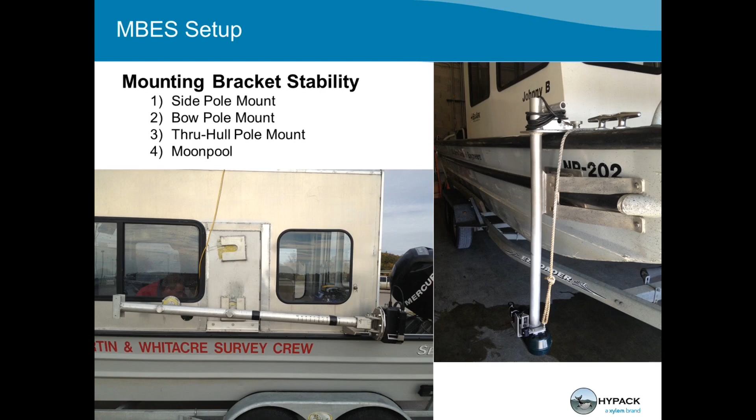Typically, what we try to stress is the 2 points of connectivity to the vessel, whether it's a side mount, a bow mount, a through hull, moon pool, that it is as rigid as possible. And I know the guys that build the USM brackets, the Universal Sonar Mount, and the one that's here, not that I'm downgrading what they build, because the material and every way they machine it is great, I just don't like the 1 point of connectivity.

Basically, if this is my mounting bracket and this is my pole, this is what's going on with those brackets. I have 1 point of connectivity right here and 1 point of connectivity here. But if I've got this sonar, and is Pogo in here? Okay, great. I know you know all about this.

All right, so the Jacksonville district over in Tampa has a universal sonar mount. They called me up, and it's been at least 2 years ago. So, I mean, these brackets are very heavily built, and I have nothing against that. It's just with the 1 point of connectivity, how tall is the gunnel on your boat, above the water?

And then how much further is the sonar below the water? 4 feet. So think of a 9-foot lever arm that only has 1 point of connectivity here. It's got an 80-pound sonar hanging on the bottom, and anytime they got above 5 knots, this is what's going on through the water. And there is nothing that is going to compensate for that.

I don't even care if the IMU is on the sonar head. This is a high-frequency vibration below the water. It's not rolling, it's not pitching, it's a side-to-side movement.

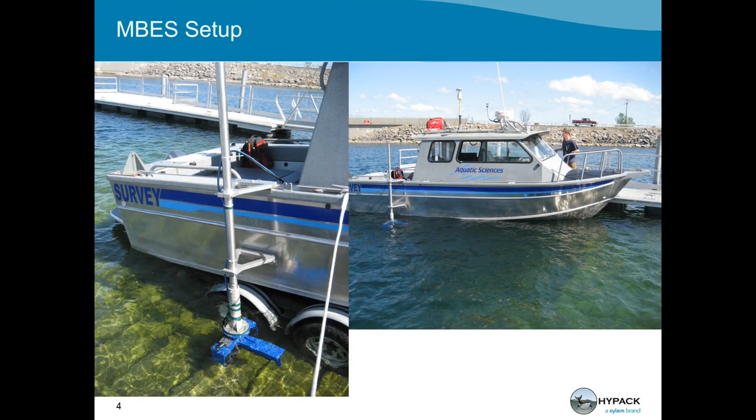Again, probably the most copied side mount bracket is this. I think industry-wide it's known as the Reson side mount. Reson came up with this back in the 90s. It's a very simple U bracket here with a disc welded to a stub arm that's welded to the main arm.

All right, it's got another very similar disc with the stub arm welded to the main pole, and this rotates up into this one. And if you can see, there's a little dot right here. That's a hole that has a matching hole on this disc here, and it's the size of a number 10 screw.

So you just go to Walmart or Lowe's or Home Depot, buy the cheapest pot metal number 10 screw you can get, and you run it through the disc here that runs through this plate. You put a nut on the back side of it, and if you hit anything with the sonar, it simply shears that bolt and kicks the whole system up. Don't damage the mount, don't damage the sonar, and it works really well.

Another point about stabilizing this - we probably have a few overseas people here. There's a gentleman named Duncan Mallace over in England, probably one of the most well-known multi-beam surveyors in that area. He got invited by Reson to give a talk at their users group meeting, and they posted this on their website. I emailed Duncan asking if I could use bits of his presentation, and he said by all means, please do. So let's listen to what he has to say.

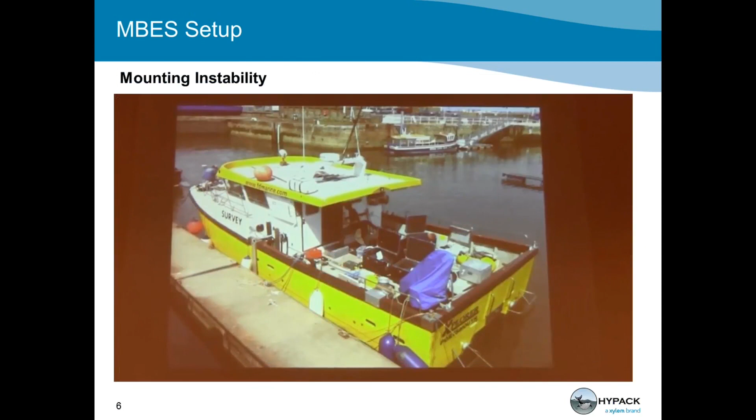We have a two 7125 system here, so we have one 7125 on this pole, and there's a similar setup on the other side. Getting your pole right with your pole mounting hardware, if it's not hull mounted, is absolutely essential. You cannot beef up your pole anymore.

I'm going to stop it right there, but if you can see, this will work. See the little skinny pole here? That's what they were given to mount a Reson 7125 to. See the big pole he's got here? That's what he replaced it with, because they're running a 7125 on each side of the boat - dual 7125s, one on each side. That little scaffold pole is what they thought they could mount the 7125 to.

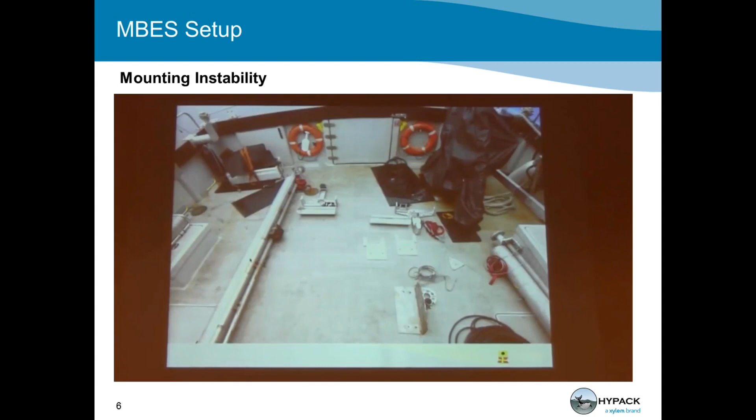He said, forget it, that's not going to work - this is what you're going to have. So we just got a large amount of tubing and structure, and you've got to make sure that fits well to the side of the boat. If the pole moves, you're on a hiding to nothing, you're going to have bad data, there's no doubt about it. So you need to be as good as you possibly can.

Same thing happened recently, last spring. I got a phone call - a customer working out in the Gulf sent the data in, and I could tell the pole was moving. I told them the pole was moving. They didn't believe me, so they flew me down. I got on the boat and said, are you sure the pole's not moving?

This is one of the units, a USM universal sonar mount, again just a single point of connectivity up here. You can see this is like a 12-foot lever arm. And I said, I'm telling you, the pole's moving. No, the pole's not moving. Really?

So while it's up, I had to move this stub arm out of the way, and I just reached over to the side of the boat and gave it just a quick little push. The camera is not moving - and that's in the air. Imagine when it's in the water. This is a 90-foot boat. When it's moving 5 knots through the water, the hydraulic force applied to that pole, it's sitting there doing this through the water.

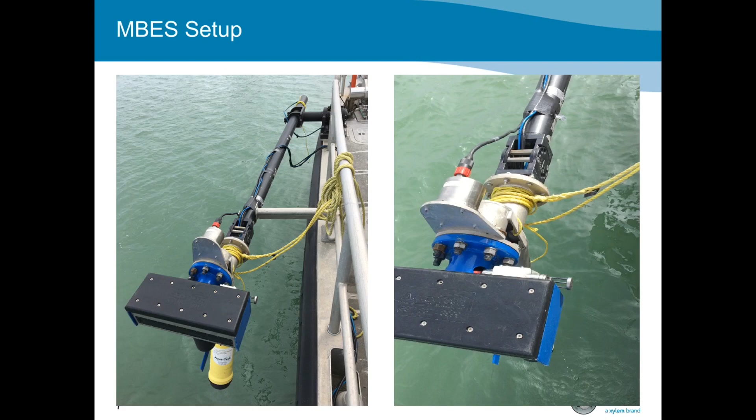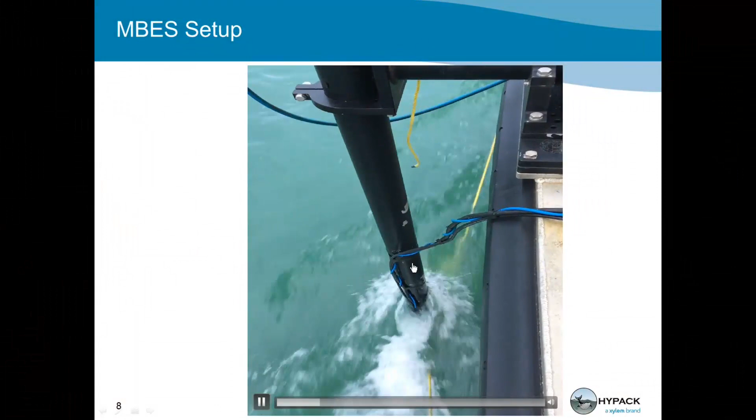So they said, we still don't believe you. Okay, well, let's put it in the water. So we put it in the water, and I did the same thing. That thing's not moving side to side? Really? How long is that pole? 12 feet. Oh yeah, you can't expect it - that's a high frequency motion.

So even if the IMU is on the sonar or on the pole, what's changing is the relative offset arms to the primary GPS antenna. So the antenna says, I'm not moving. The IMU says, I'm doing this. So it's trying to compensate and move all the positions. And the data showed it.

So they literally took me right back to the airport. I got on a plane, came home. But their suggestion was, what do we do? I said, you need to either bolt or weld something to the side of this boat. And the company that owned the boat said, you're not doing that. Yeah, matter of fact, I think they even built one now.

It's real simple - it just needs to be like a C cup like this, that its ID matches the OD of the pipe, and then it comes over and somehow locks on the side of the boat. It's more side to side than it is front to back. The front to back is typically never the problem - it's the side to side movement.

Yeah, but even if you would do it, that's only going to support one side flex, because if it doesn't secure to the side of the boat, it doesn't have anything that keeps it from swinging away. It would help on one side, but not the other. Another option would be a flip-down stub arm on the pole, or to run a ratchet strap under the hull. It might be ugly, but if it works. It's better than what this is. I have nothing against the manufacturer and how this is built, it's just that it only has one point of connectivity.

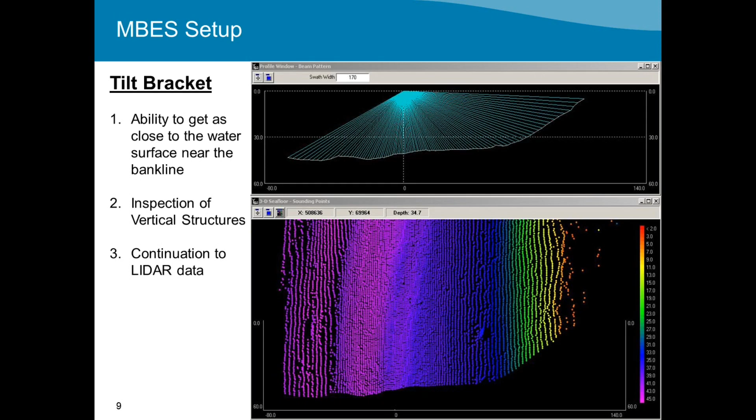As I showed yesterday in the hardware setup for the Multibeam, you can load multiple instances of the same device, where you'll have an instance where it's straight down, and then another instance where it's maybe 15 left and 15 right, with all the different offsets for starboard, vertical, and roll. Do your patch test for all three setups. Then when you need to use one, bring it out of the water, make the physical change, go into hardware, disable one, enable another, and you're ready to go.

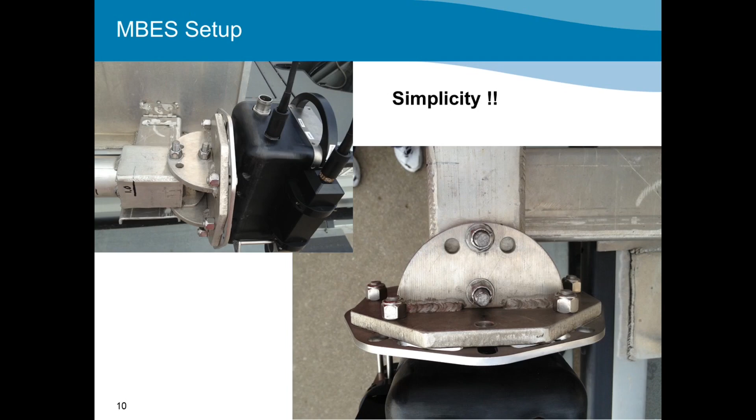This is the bracket that I had built when I worked at the Corps. You can see dark circles in these holes - those are stainless steel inserts that I had put in this flat plate. When it was in the straight up and down orientation, I had them tack weld these two pieces together, drill the hole straight through, and put the stainless inserts in so the holes lined up perfectly. I had them cut the tacks, tilt it 15 degrees, tack it again, re-drill the holes, put the stainless inserts in, and I spent about $5,000 having that little 3-foot stub arm built.

So now I felt very confident that when I loosened this bolt, pulled these two bolts out, rolled it to the left or right, and screwed it back in, my offsets for my patch test values didn't change, because I knew how this was machined and put together. I did a patch test anyway just to have it in my hip pocket, but they never changed.

This is a new feature that I put in this year. I talked about it last year, but I wanted to give some more graphics to it - the convention of offsets, starboard and forward versus X and Y.

HYPACK convention: we tell you what we want - starboard offset, vertical offset. Most every inertial system wants X, Y, and Z. Now the question is, what's X? What's Y? What's Z? Which direction is positive? In HYPACK, we're starboard positive, forward positive, vertical down positive. That's our orientation.

I pulled the next three visuals straight out of the inertial manual for the device I'm getting ready to show you. For the Novatel, they use X, Y, and Z offsets. X is their starboard, Y is their forward, just like us, except Z is positive up instead of positive down. So HYPACK is like this, and they're like this. That's the Novatel, and again, I copied these straight out of their manual.

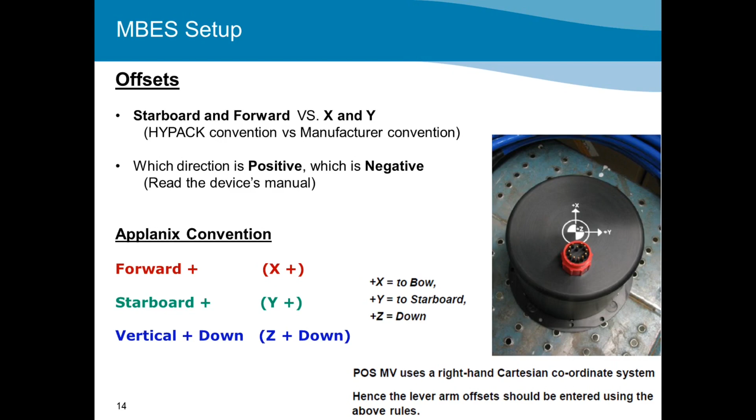The next one is the Applanix. They are X forward, Y starboard, and Z down. So they're like this - except this is X and this is Y, instead of HYPACK where this is X and this is Y.

This is the ixSea. They're X forward, port positive, and Z up. So they're like this.

Please read the manual for the devices that you have, because everybody's convention is not the same. I really wish everybody would change to starboard, forward, and vertical, then there's no question. But when you're using X, Y, and Z, you better read the manual to understand which direction that is and which direction is positive.

The other thing too is, in HYPACK, what units are you in? Well, we're in the units that your project has been set up in. Almost every inertial system - and I have nothing against this, but most come from out of the country - uses metric. We're in the US right now, and everything goes by US survey feet, which from what I understand is going away. We're going to be going to international feet.

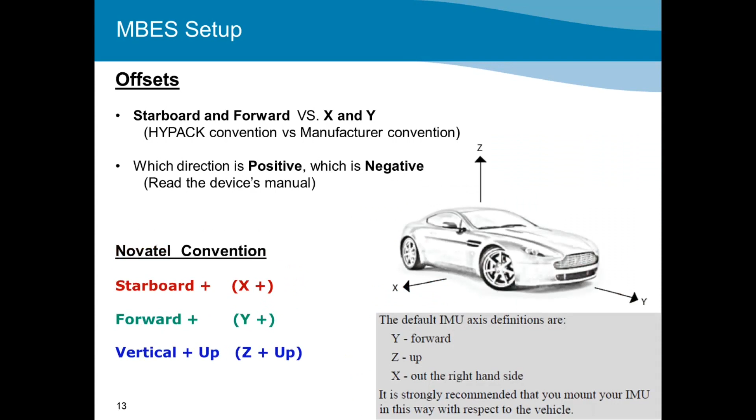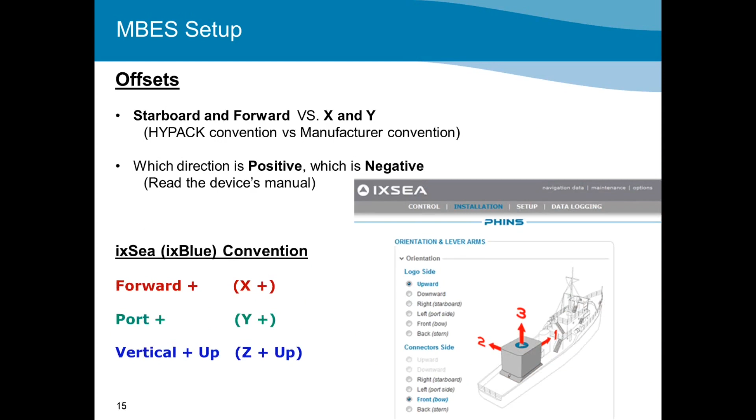But again, make sure, this is going to go back to my inertial systems here, in HYPACK, the units are always whatever the project is in, but the inertial systems are always typically going to be in metric, and Applanix is really good because they put that little meter sign right beside it to let you know, make sure you enter it in meters.

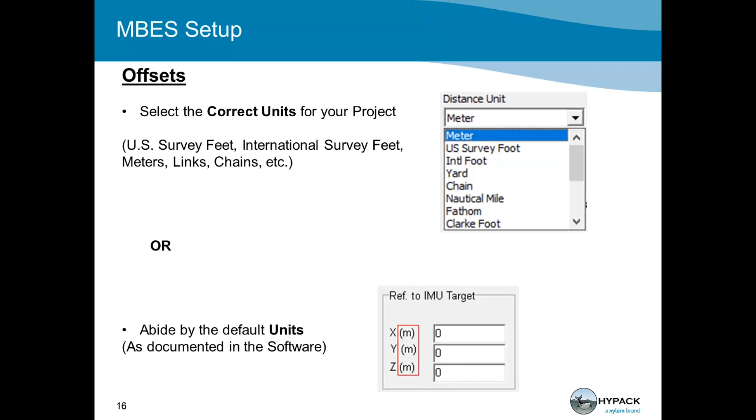But what you don't want to do is, usually the first thing you're setting up is the inertial system, and you measure and convert all the offsets to metric. Now you go into HYPACK and you're in US survey feet and you go, what was the starboard offset for that? They call it out in meters and you enter it in meters. Now you're off by a factor of 3.3 of what the true distance is that you should be entering in. But luckily enough, if they're in HYPACK, we can fix it in the editor, so that's not a problem.

Am I kidding you? No, I'm not kidding you. Don't get me started on the metric system.

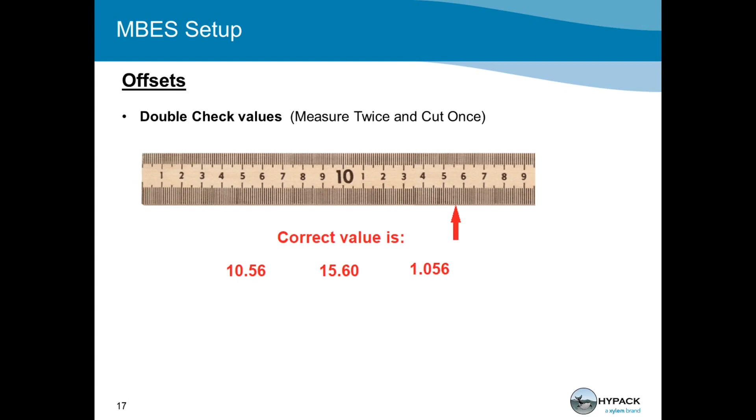Anything that goes in the same direction as a survey line and is considered constant, if you like, is not part of the seabed. That's been introduced into the data by some misalignment error, calibration error, or physically the pole moving. So if you see anything like this in your data, then you need to get rid of it, and you'll find out what's causing the problem and get rid of it, because it spoils it.

All right, just to make numbers simple, let's say I have 74 beams. That's going to space every beam 1 foot apart - that's what it's going to try to do. But if I hit a vertical wall, how does it horizontally space beams 1 foot apart when they're equidistant when this is a vertical wall? It can't. Now, I know there's some high-powered math going on with a lot of the newer sonars, and maybe they figured out a way to get around that. But you'll have to talk to the manufacturer and get them to verify that.

This guy, like I said, is one of the best in the world, and he's at the Reson Users Group meeting. Even in the Reson manual, it will tell you that for flat bottoms, that's when you use equidistant. For significantly changing terrain bottoms, you should use equiangular.

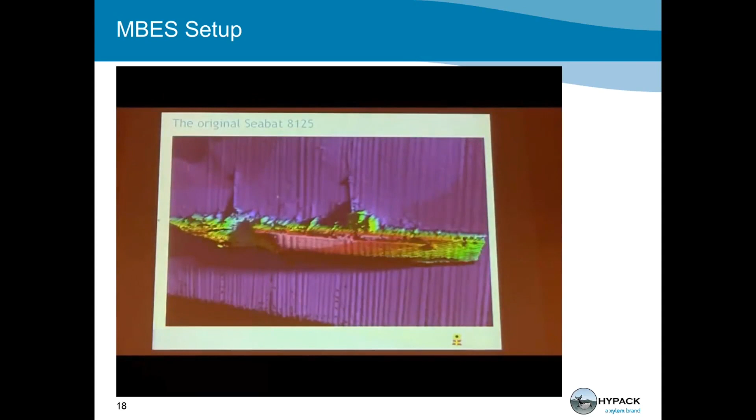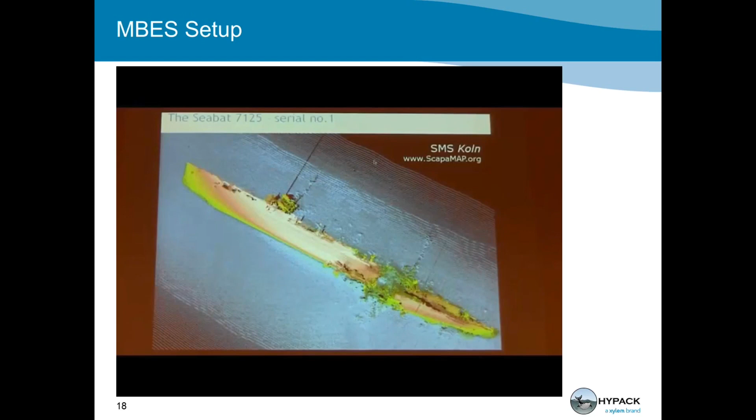Another top tip: don't ever do wreck surveys with equidistant spacing. It's just horrible. So equiangular, 256 proper beams - none of this made up extra beam malarkey. 256 proper beams, and you get good quality results.

So again, some tips about collecting your data. What I usually say about a multi-beam survey is, people would say, Joe, if you were going to buy a multi-beam system, which one would you buy? Well, the way I look at it is I'm going to go to my toolbox and pull the best tool out to do the job that's required.

Everybody familiar with Harbor Freight tools here in the States? Harbor Freight tools is like the Walmart of cheap tools. And I'm not going to go to Harbor Freight and buy a $2 hammer to re-roof a 3,000 square foot house, because I'll be back 50 times to buy 50 more hammers when I break that $2 hammer. I'm going to buy the $150 hammer and do the job with the right tool the first time.

So I wish I could tell you there was this all-in-one perfect multi-beam system that does everything you'll ever think you'll need. I just don't believe it exists.

So I tell people, read the end of the book, or read the end of the scope of work that says, we want this as the final product - 1 foot spaced data, half foot spaced data, 5 foot spaced data, 10 foot spaced data. What is the end result?

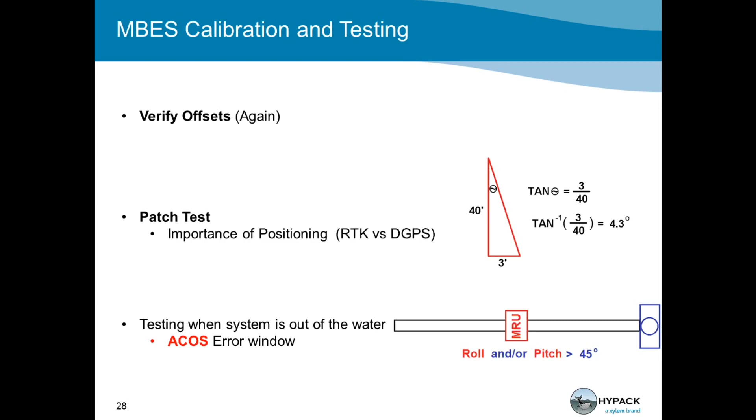All right, I added a few screen captures to this from the last time.

In terms of pitch and roll, your echo sounder has an MRU inside and it does real-time correction of the swath. Is it necessary to disable the roll so it doesn't get flagged twice? No. A flag comes through from the sonar telling us it's already been pitch or roll corrected. There's a flag in the data packet.

A couple years ago, probably around the 2016 timeframe, we got a lot of phone calls about people using AMLs who couldn't figure out why their depths were about 100 feet deeper than they should have been. What we found out after talking to AML is that they put in a new selection for the output. They called it HYPACK 2015.

It's reasonably understandable what they did. They said, well, if you're going to be working in a feet project, we'll just output the HYPACK VEL file in feet as well, the depth in feet and the sound velocity in feet. What they didn't know is ever since the beginning of HYPACK, we always store depths in the units of your project, but we always, always store the sound velocities in meters per second.

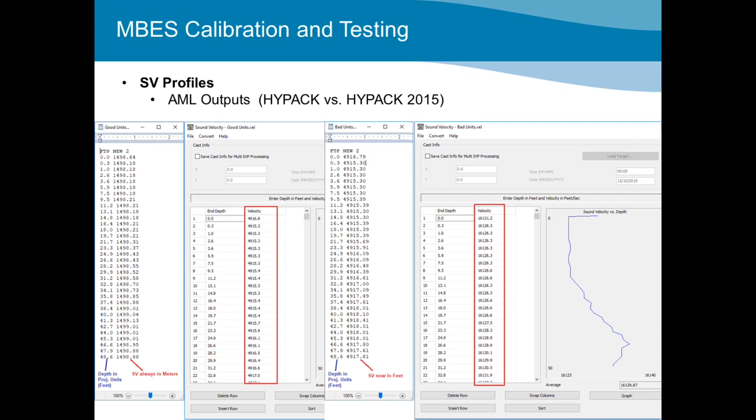For data collection, know the final product expected from you. What is the accuracy, the data density, coverage, overlap? Is there a timeline you're being held to? That will tell you what equipment to use, whether high resolution or not, and how to collect the data - can you get away with a 10% overlap, a 25% overlap, a 50% overlap?

Two suggestions: if this is post-hurricane and the Coast Guard wants to know if the navigable channel is clear, minimal to 0-10% overlap is all you need, because they just want to know if there's any debris in the navigable channel that's a hazard to navigation.

But if I'm doing any other type of survey, even a project condition survey or a dredging survey, which requires 50% overlap at least by Corps standards, I'm going to do a 50% overlap. That way, if I move over to the outer edge of this swath with my next pass, I'm getting 50% overlap on the previous one. And if I want to chop 5 degrees off this one and 5 degrees off that one, I still have overlap between those two passes.

It just makes the processing a whole lot easier, and it's going to create maybe a minimal amount of time extra in the field to collect the 50% overlap, but I'd rather have more than less. Because the last thing you want to do is go back, when maybe you only had a short window to get in to do it anyway. Do it right the first time.

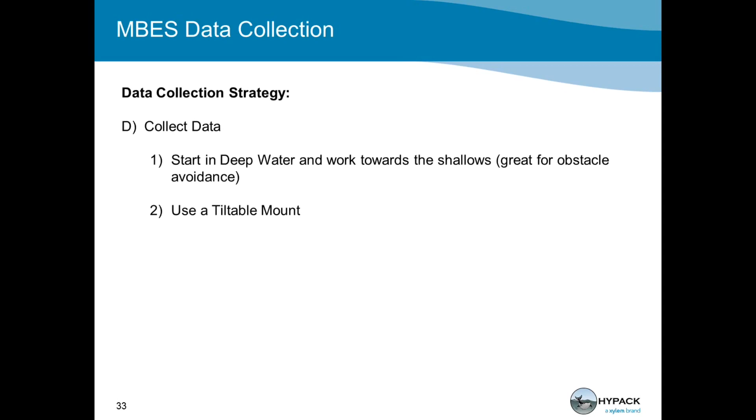Couple different strategies. I've heard several people already say this this week: start in deep water and work towards the shallows. Shouldn't be hitting anything in the deep water, and working towards the shallows is great for obstacle avoidance. Another thing that's great for obstacle avoidance that I've already shown you is using the tiltable mount. To me, I think that saves tons of time, is a safety issue, and will give you coverage almost all the way up to the water surface.

Processing. One of the things we've talked about is this new auto pre-processing feature that we've added into the MBMAX 64 program to potentially get you closer to the final product as soon as the survey's over. I'll just tell you right now, I'm not a fan of auto processing. I think there's too much black magic going on in the background.

I saw David Wells about 2 months ago at the University of Southern Mississippi, sitting in his office, and we were talking, and I said, you know, I use page 4 out of your cube manual all the time. And that's why I put it in here, and this was written by him. It says the last point is very important: CUBE, which stands for Combined Uncertainty and Bathymetric Estimator, where the E is the key, is by definition not a complete solution to the hydrographic processing problem. It will not ever replace completely a human operator. And I think this applies to every auto processing program on the market.

The goal is to provide a power tool to assist the operator, and I think the most key word in editing data is interpreting the data. If I gave 60 or 70 of you the same raw data set and said, at 5 o'clock give me your final XYZ data set, I guarantee no two data sets would be exactly the same, because it's your interpretation of what the valid data is. The more experience you have processing data and understanding everything going on when it's collected will influence how you interpret and process it.

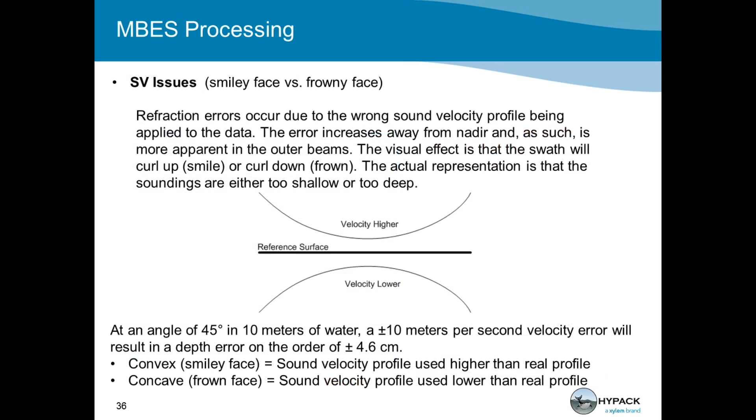We did a survey over in England two years ago, and the RTK was in and out the whole time. We were trying to do a patch test, collected the data, brought it into the office, and calculated all the patch test values, and they were okay. I wasn't real happy with how the overlaps worked out, but that's what we got, and the guy from Applanix was there.

He post-processed the data that night, brought the SBET file in the next morning, in front of a class of about 12 people. We uploaded the SBET file and applied it to what we'd already brought in with the patch test values, and now the data blended beautifully. We got slightly better values for all of our patch test values, and everybody was able to see how valuable this tool could be to their data.